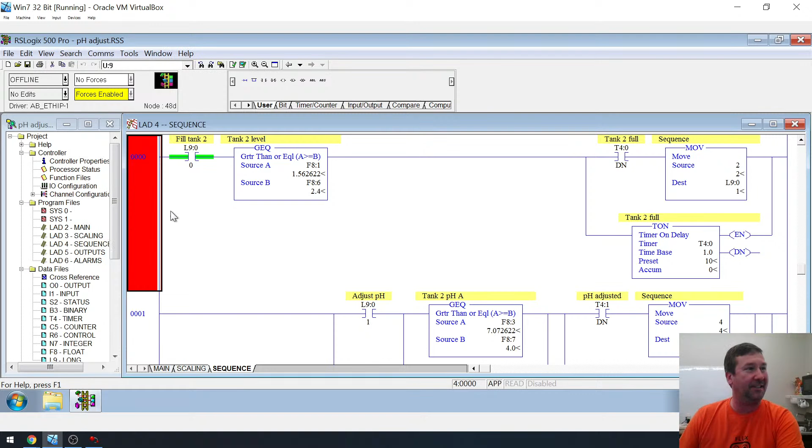And this isn't a complex program by any means. That's why I thought it would be a really good one to try this with. It's got 5 subroutines, and it's fairly basic. So let's just take a moment to go through it. The main routine really is just breaking into various different subroutines. And we get some scaling because there's some analog. All of it's fairly basic, but we got some sequencing, and so we can talk a little bit about sequencing.

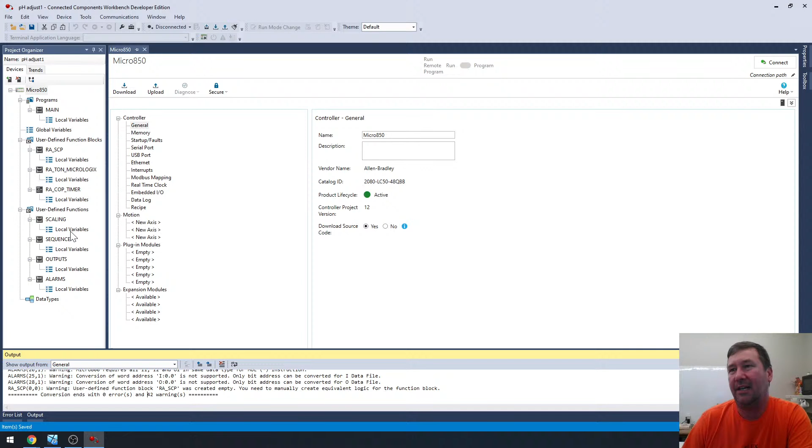And now I hadn't actually looked, but all right, it does make kind of a TON conversion. That may even be worth a video. As yeah, it is converting the TON into more of what we're used to seeing in RSLogix 500. Let's see, scaling. Again, it doesn't look bad. You can see it couldn't figure out exactly where this analog input was.

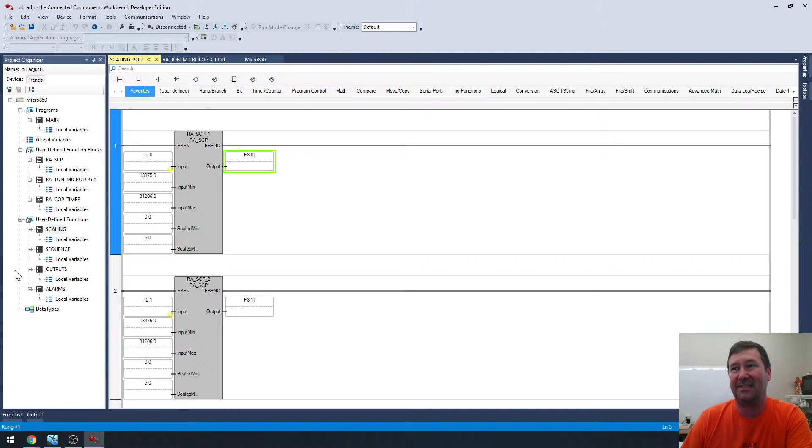There'd be some mapping. But here's where I start to have a problem with most of these conversions: this was F80 in the previous program. And that is how the data structure works in RSLogix 500. But we have so many more options in Connected Components Workbench with tag-based addressing. So I see conversions done like this, and they just don't make a tremendous amount of sense. And if we go on into sequence, you're probably going to see some of the same thing.

Yeah, so in this case, if we go back to our RSLogix 500 program and sequence, let's refresh my memory here. Then yeah, we were using actually a long integer to sequence through this, and it was L90. Now I wouldn't use L90 if I could name it something. I would probably name it sequence.

So while this does get you the rough structure for your program, either one of two things are going to happen. You're going to spend a tremendous amount more time trying to straighten out the addressing, or you're going to put it in there like this and really hate yourself later down the road when you need to troubleshoot it.

But okay, so let's just close this out. And then we're going to start a new program. And we'll just call this PH. And we're going to create it. And then for my controller, I have a Micro850 PLC. And it's going to be a 2080-LC50-48QBB.

That'll be it. And this is, because somebody asked me when I posted that I was going to do this, well, why would you not just use another MicroLogix 1400? This is a neat new feature of version 13: when you select these, it'll tell you whether they are actively supported or whether they're on the obsolete list.

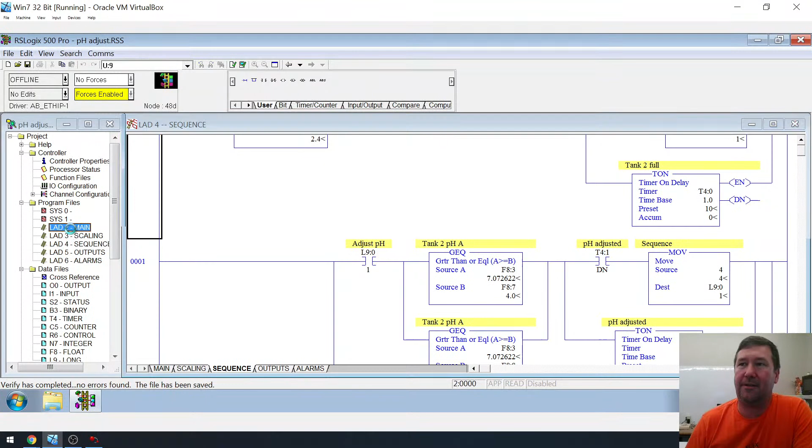And finally, we have alarms. Now, unlike if we had made these user-defined function blocks, in this case, each one of these programs is going to be executed. And they're going to be executed in the order that they are here, which means it's going to be pretty much the same, because up here, if we go to main, well, we have an AFI, which is an always false input, and we won't even need that in Connected Components.

But really, this program jumps to the scaling, and then to the sequence, then to the output, and then to the alarms. And that's the end of the program, and it's going to come back around and do it again. So this is going to do the same thing. We're going to execute the main, calculations, sequence, outputs, and then alarms. And then we're going to do it again. And it is in exactly the order that you have them here.

So if I take the outputs and drag it up above sequence, that is going to change the order of operation of that. So I'm going to put that back down. But yeah, then if we actually look, we're done with the main program. Now, chances are when this machine actually goes into service, there'll be something in here, and I don't even know what it'll be. But we're actually done with the main program because we have the always false input, and we've replaced our JSRs with these.

So now let's go on to our scaling. So in our scaling routine, it looks like slot 2, input 0. All right, that was our tank level, and it's 0 to 5. So we're going to make a structured text example of this. Oh, but I didn't add my I/O module. So yeah, I created the Micro850 here, but down here I have an expansion module. I have a 2085-IF8.

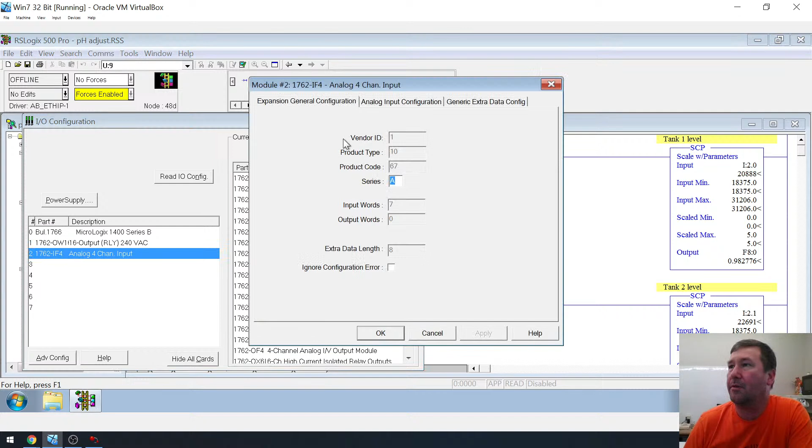All right, and let's just go ahead and look at what we have and what we're using. So we're using 1, 2, 3, 4. Looks like we have 4 of those inputs we're using. And it looks like they're all set up for 4 to 20 milliamp. But if we're not sure, we can double click on our I/O configuration and then double click on the 1762-IF4. Go to analog input, and yeah, we're 4 to 20 milliamps on all 4 channels.

All right, so channel 0 is enabled. I think all these are probably enabled by default. Yeah, and I'm just going to leave all of them enabled. They're all default configured for 4 to 20 milliamp and for engineering units. And so I should have got that up already, but engineering units, let me just Google 2085-IF8 scaling. Just make sure I'm right on this.

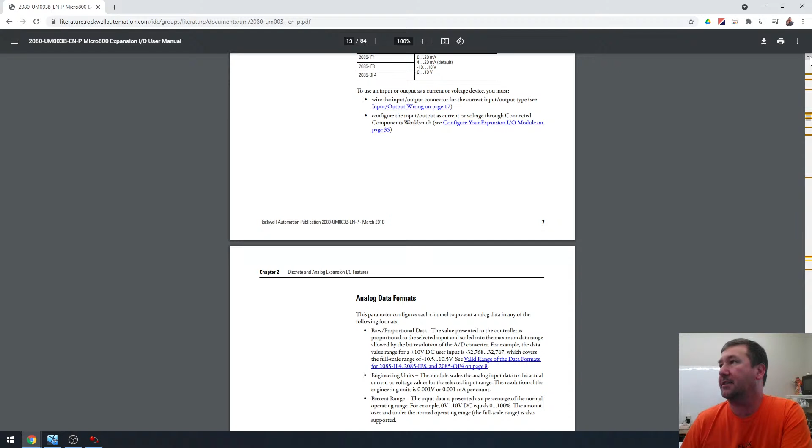Yeah. Okay, so if we look here, here's the manual. We have, here, what are we on? Page 8 of, let me go back up, what manual is this? Google's awesome, but sometimes I don't get all the details. The Micro800 expansion I/O modules. And if we go down to page 8, then we can see what our engineering unit scaling is going to be. So we're configured for 4 to 20 milliamps here.

And at first it may look a little weird because the scaling is showing 3200 to 21000. But if we look down here on note 4, it says the full range value of a 4 to 20 milliamp is going to be 3.2 milliamps to 21 milliamps. So that's where we're getting this value from. 3.2 milliamps is 3200 and 21 milliamps is 21,000. So 20 milliamps is going to be 20,000 and 4 milliamps is going to be 4,000. We can scale it in between there. All right, bring that over here.

Okay, so let's go into what we label our program called calculations. And then, yeah, well, we haven't even talked about where I/O is. So now, and I didn't even catch this. So I'm in version 13, and all of a sudden it was a little bit of a struggle because I normally use the Logix view. So I'm going to switch over to Logix. And I got to tell you, Rockwell, y'all have done a great job of really massaging this.

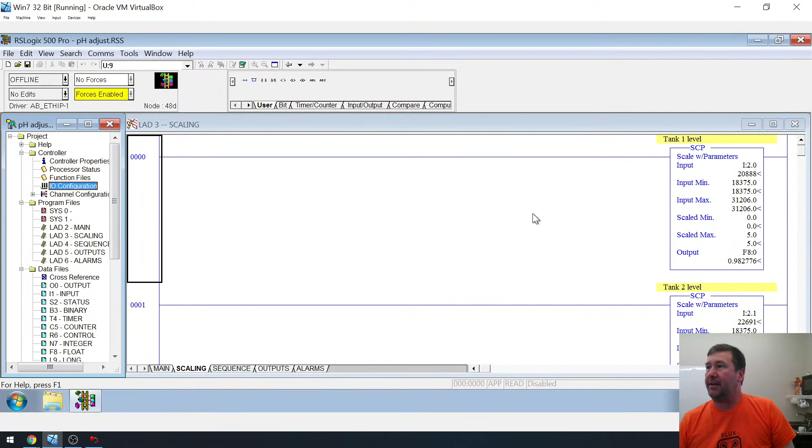Actually, we should go ahead and put some descriptions in before we go too much further. So if I go over here, well, I can see them all here, but let's go ahead and right click and go to data table. Input number 2 is going to be tank 1 level raw. So I'm just going to go over here and label this one as tank 1 level raw.

And then we have tank 2 level raw. And then we have tank 2 pH. I actually have a spare there. Okay. So tank 1 level raw, tank 2 level raw, and then tank 2 pH. And then let's go up and label all of our inputs and outputs while we're at it.

So if we just use our box down here in the bottom left, we're going to go to outputs first. So O, and then let's see, we have 0 is a spare. And then 1 is going to be an alarm light. And then 2 is going to be a buzzer, then a spare, and then pump 1. So alarm, buzzer, spare.

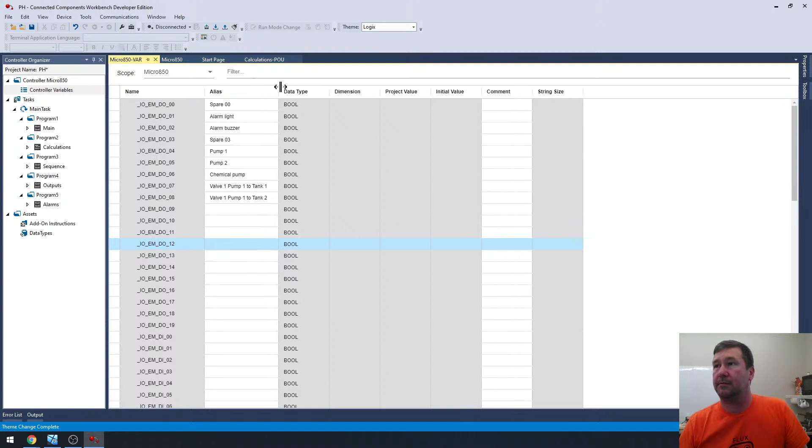And then number 9. All right, valve 2, pump 2 to tank 2. And valve 2, pump 2 to effluent. Valve 2, pump 2 to tank 2. Valve 2, pump 2 to effluent. And then we have number 11.

All right, it's spare. Let's drag this out just a little bit, so we can see it all. And I'm going to hit the usage here. Okay, so those are the only outputs that are used on it. Then our inputs down here. Let's see. I don't think there's any discrete inputs used on this. Oops, no, I'm on outputs right now. No wonder this doesn't look right. Okay, let's go to there.

Okay, there are a few inputs used on it. So we have input 4, which is emergency stop pressed. And before somebody says it, no, the emergency stop on this is hardwired. This is a signal to let us know that it is pressed. So input 4 is going to be emergency stop pressed. And then input 5 is going to be 24 VDC power OK. And then we have an alarm silence, and number 9 is a downstream interlock.

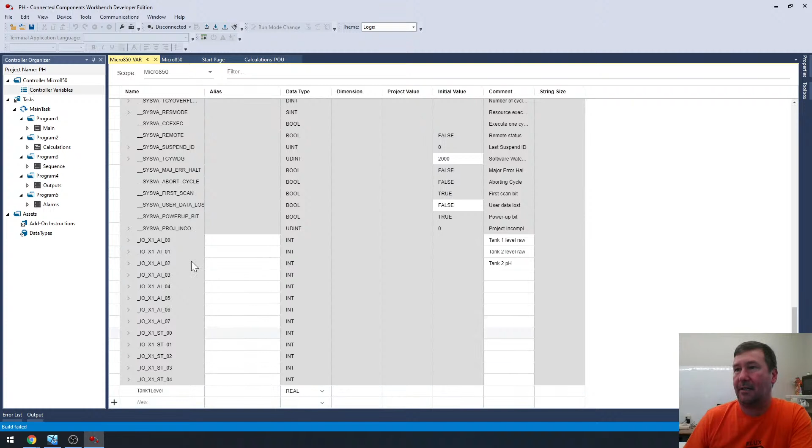If we go and look in our controller variables at our expansion modules, they are integers. So they are whole numbers. And so when you're manipulating data, you have to stick with whatever you have. And so what we need to do is convert this integer into a real. Or we could specify everything else as an integer. And I do see that done, and then people will like multiply 10 at the end of it. But I guess it doesn't matter in the end, but I think it just looks better to say 5 or 4.5 feet or something.

So what I'm going to do is I'm going to go to the beginning of this, and I'm going to type any, and you're going to see all the any instructions coming up. And if you're not familiar with those, we got some videos on those. But we're going to find the any to real. And we are going to any to real that value.

And now we'll hit our verify. Okay, and that error goes away. Now the semicolon, that's the one that usually whips me. So let's take the semicolon out just so you can see what that would look like. So if I hit the verify now, semicolon expected before this new statement. And if we double click on it, it gets us close to where it is. And really, if I see that, I just start looking down the lines, which obviously we only have one right now, but start looking down those and chances are you'll see it.

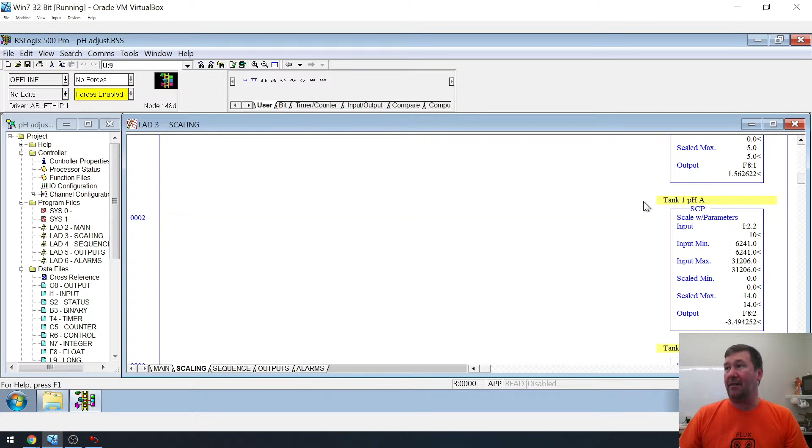All right, so the second one will be tank 2 level, and it is the second input on that expansion module. So let me make sure I'm not making a big assumption. I assume the scaling is the same. 0 to 5, 0 to 5. Okay, and then we have a pH, and our pH scaling is 0 to 14. And I really wish I had a scaling that the lower number wasn't a 0, because that's probably a good thing to go through. But we'll save that for a different video.

So this one will be tank 2 pH. And we are going to multiply by 14 instead of 5. And go ahead and hit that verify again. And hopefully I got my math right there. Like I said, we won't be testing this today. This is more of let's write the program.

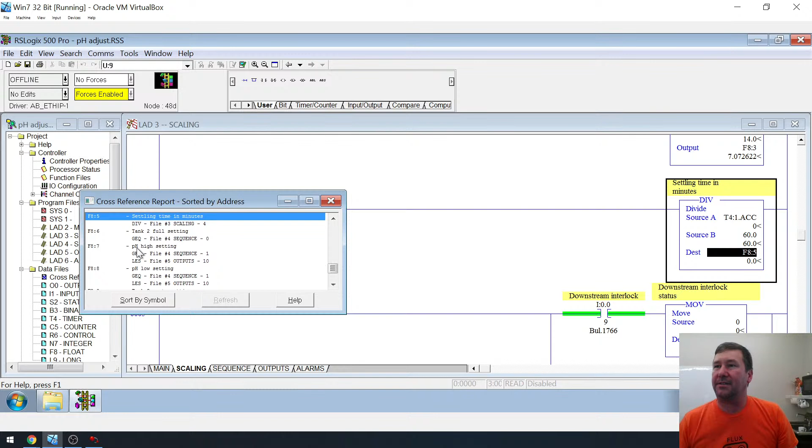I was getting ready to say, I think we're done with our calculations, but no, there was something else down here. Okay, so we are settling time in minutes. So we're making something probably for an HMI screen. Yeah, this was probably read in the HMI. So I'm going to right click F8.5 and figure out where this is used. So go to cross reference. Okay, and so this is the only instance this is used.

And if you see something in a program that is the only instance it's used and you're like, well, they're not actually doing anything with it, don't ignore it. Because it could be connected to a larger system, such as a SCADA system, or in this case, there's an HMI that tells you how much more time there is that this needs to settle before it's going to run on through the process.

I really want to go make that timer first. So what I'm going to do is create just a spot here, because we'll get to that timer fairly quickly. Oops, okay, here's where I didn't review this, but I still think I like the way I did it, because I really wonder why that timer is where it is. I can do that in structured text. All I'd have to do is put the timer value divided by 60, and we would have it. Actually, yeah, I probably would do it that way. So I'm going to go over here to our sequence, because that's where it comes from.

And I am going to go to the timer tab and bring down a TON instruction. And immediately when you make a TON, it names it something, such as TON_1, which is okay, but it's not necessarily the most intuitive thing to find later on.

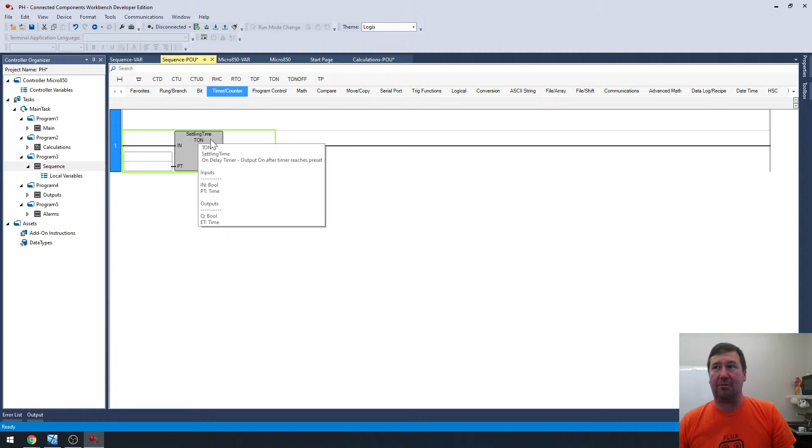All right, now that just makes it so much clearer what it is. And I see a lot of programs that have TON1, TON2, TON3. I just think this makes it a lot easier to understand later. So now let's go back to our calculations.

And, well, one, we need to create a controller variable. And I do want these particular ones to be controller variables, because this is something we're reading from elsewhere, or sending elsewhere. So this is the settling time in minutes. Now, you may be tempted to make this a time data type, but this actually isn't a time data type. This is a real. We go back and look at our original program. It's F8.5, and F8 is a floating type variable. And so that's going to give a decimal of how many minutes are left.

So now let's go to calculations. And we're going to put that our settling time in minutes is going to be equal to settling time. Ooh, all right. So I made a mistake there because I said that was in a local variable here. And I said earlier, I think I would put this over with this one. Because really, I like to group stuff by its function, and this was probably added later, and honestly, I did write this. It was added later without a lot of thought because somebody probably wanted a timer. I'm like, yeah, throw a timer in, throw it on the HMI, and we're done.

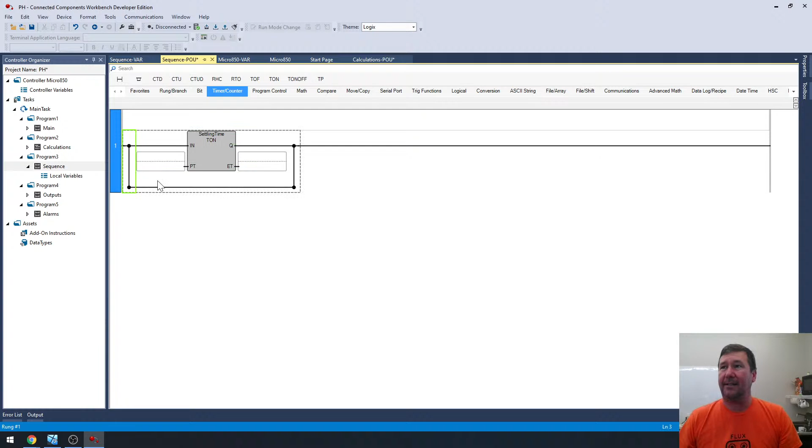But no, if I was writing this from scratch, and here's why I don't like the automatic conversion tool, the MicroLogix to 800 converter, this is one of those cases, that little glance of it, I just realized, okay, that could have been done a lot better. So I really do want this down here in this sequence, and I probably want it right here with this. So I would probably put a branch here, and then I would bring down an instruction block, and it would be a divide.

And okay, first we need to assign this elapsed time. So we're going to create a variable. And this will be settling time in milliseconds, ms. And so I'm going to make that a DINT. And then we're going to take that same thing, we're going to put it right there. And then make sure I'm on the right track here. Yeah, okay, that was divided by 60.

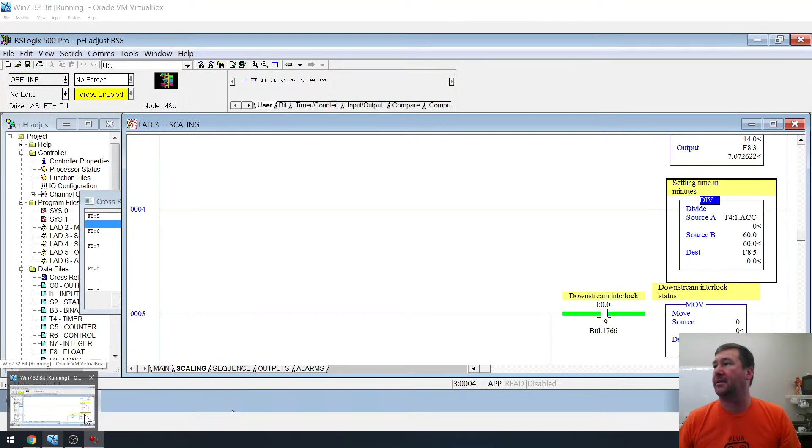Now, this is in milliseconds though. So we're going to need to divide by 60,000. Or, can I do that here? I know I want 60 seconds. I can put T#60S. And that's going to tell it 60 seconds. Oh, and it doesn't like it because that's a time data type. Okay. So it would have to be 60,000. And then we're going to put that in settling time in minutes.

Okay, now you notice right now there is no preset time. We'll come back to it. Right now I'm trying to still get to that calculations program. I think there was one rung left. Okay, so then we have a downstream interlock. And it looks like both of these were probably added at the same time, and they really have to do more with some HMI signals that were needed.

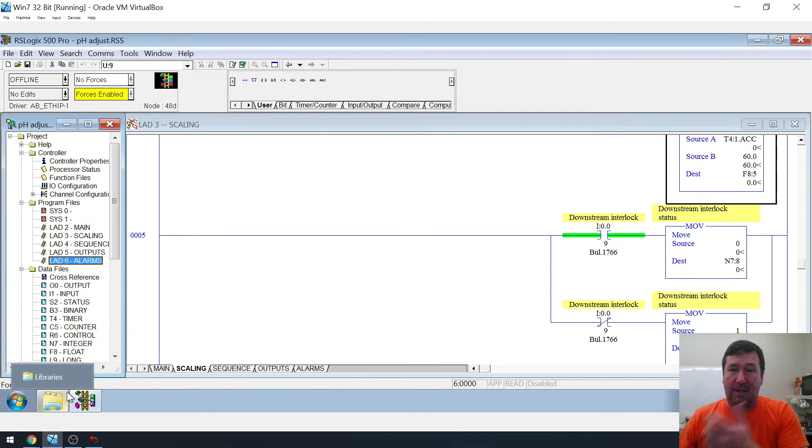And I was probably thinking there might be a multi-state needed eventually, but it looks like I only used 2 states. Here we're going to keep it like that. But I'm going to move it to the alarms program because I think it makes more sense there. The alarms are really mostly HMI indicators, and this is an HMI indicator. So there you go. Now you know, guys, my programs aren't perfect. But all right, so we're going to go to the alarms.

And that was going to be input 9, so we'll go to the I/O tab, and we're going to go down to our inputs and find number 9. And then we're going to bring an instruction block down, and this will be a move. And in this case, let me make sure I got these straight. If we have a 1, or if it's examine if closed, then we put a 0 in. So, okay, that one's wrong. But we're going to use it in a second.

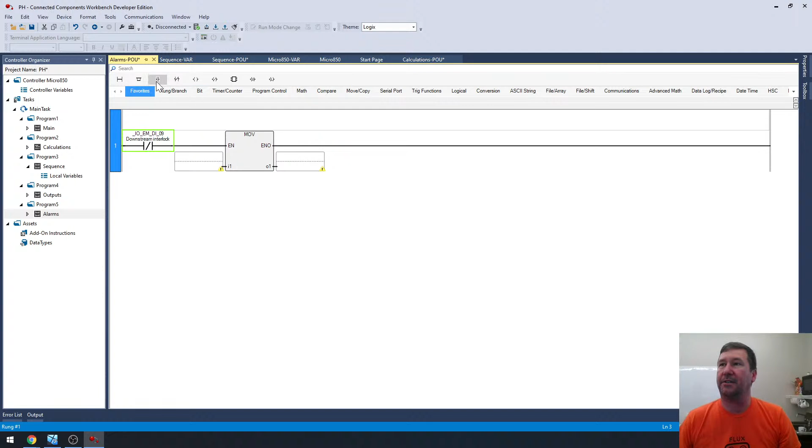So let's go and put a branch in. Drag that and that. And yeah, we're going to put a 0 here. Copy that. I'm going to paste it here. Oops, got it on the wrong side. There we go. Okay, and this needs to go to, I believe that was an integer. Yeah, so N7:8. Okay, this is downstream interlock status.

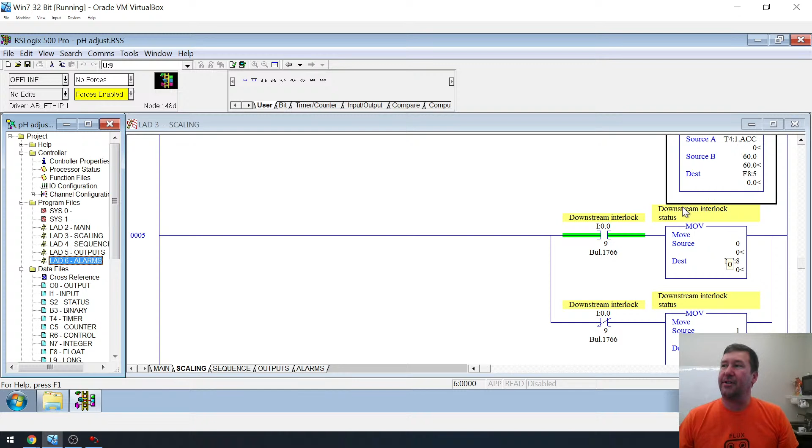So that's what I'm going to name it. So I'm going to double click here. And it's going to default to local variables, but I need this on the HMI, and so I'm going to make it a global variable up here. So downstream interlock status. And that will be a dint. Put that there. Okay, and then, is that it? That is it. So that's it for our scaling. So next we're on our sequence program.

All right. So this one, and I thought, man, we ought to do a video on this. We did some binary videos, but this is actually putting values into an integer. Actually, this is a double integer to shift bits, and that's how it's tracking it. So yeah, this is actually a pretty good one. Maybe we will set this up on a trainer and see if we can do some simulations with it. It might be a good one to kind of talk about sequencing some more. But all right, we're going to start with just building out this basic structure.

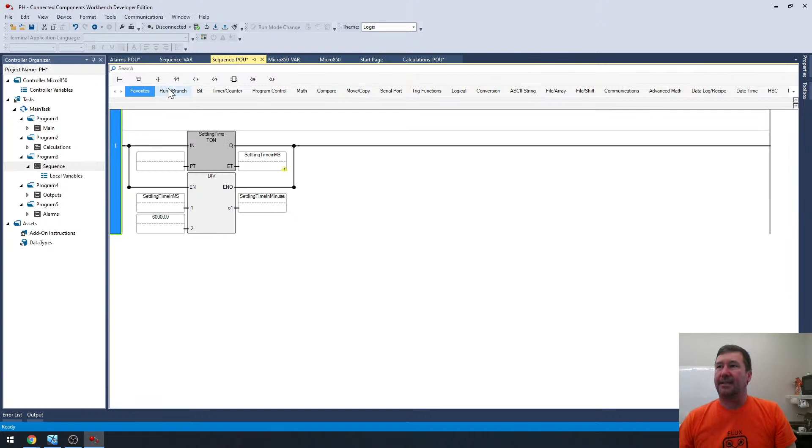So we have an XIC, greater than or equal to. We have a timer, and we have a move. It'll be a miracle if I remember all that, but let's try it. Okay, so we have this that we've added, this settling time, and we'll find a home for it in a little bit. For now, let's bring a rung right above it. We have an XIC. I'm just trying to build the structure right now. Then we have a greater. Is it greater or greater than equal to? I can't remember now. It's one of the two. And then we end up with an output.

Oops. And then we had a timer. No, we don't have an output. We have a move over here. Well, let me just go back and look. We have a move. And then there was a branch. Oops, didn't get that right. Timer goes in the top. And there was also an examine if closed. There. So let's see, is that the right framework? I think that's about the same. Yep, I think I'm there.

So we have a timer for tank 2 full. All right, then we have a sequence. And F8:1 is tank 2 level. All right, and then that sequence, this L9:0/0 is the same L9:0 right here. We're just looking at bit 0 on it. So we should be able to just create a tag right here. And I'm going to make this one a global variable because it is also in the HMI. We're going to call this sequence.

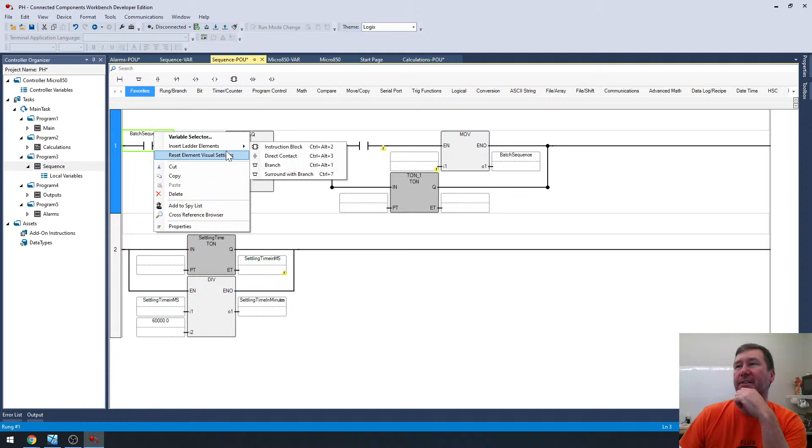But you know, I think I've ran into this before. I don't think I could figure out how to add a description to a bit based off of that. So hey, there's something maybe somebody can help me figure out. I do not know how to add a description to this. So this is going to make this one really difficult. I'm going to have to think through that. Because, yeah, I don't think that's a good idea.

So, yeah, I'm not going to do it this way. I'm going to put something in for now, and maybe somebody can tell me exactly how we're supposed to do this. What I'm going to do is I'm going to copy that, and we're going to make some rungs down here. And we're going to make a tag called sequence fill tank 2. And I'm going to use that.

That way, whenever this sequence 0, which is what our sequencer is based off of, whenever bit 0 is a 1, it's going to make sequence fill tank 2 a 1, and I'm going to use that. That way, when I'm visually looking at this, I can tell what it is. Now, I think there's probably a way to add a description to this, but I worked at this one day and I could not figure it out. Because when you get in the variable selector, can I put .0 here? Nope, can't do it. Okay, so I don't know how exactly to get by that, but this is how we're going to do it. All right.

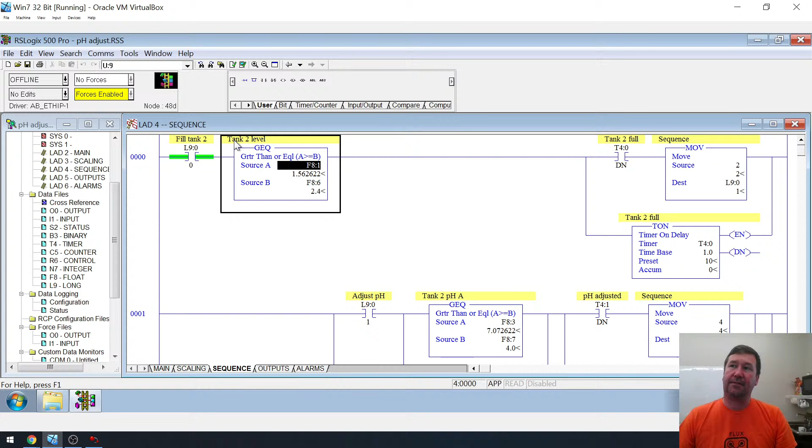So then we're looking at tank 2. So we can just type tank 2 level. And then we are looking for it to be greater than F8:6. And when you're looking here in RSLogix 500, you're going to see the description of the source, or in this case, source A. Now, if you're writing to something like here, you see the description of the destination. Source B, you can't actually see the description of by mousing over or anything. You've got to right-click it and either edit description or go to data table.

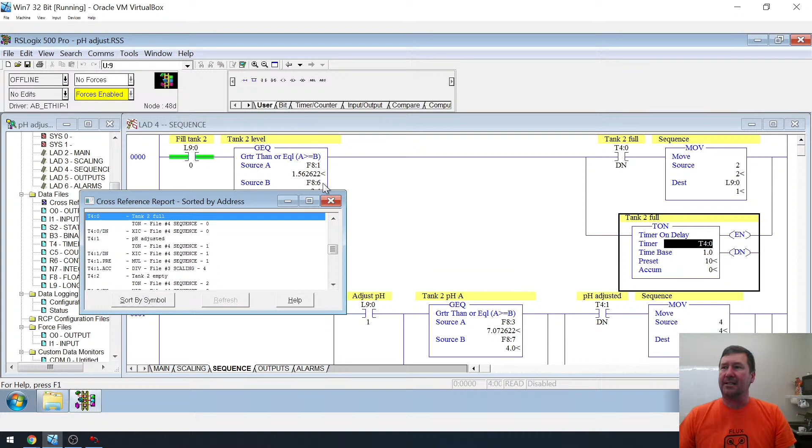And so this is tank 2 full setting. So I'm just going to create a tag that says that. So tank 2 full setting, and it'll be a real. And then we have a timer, and I don't believe this timer actually is settable externally. So what we're going to do is we're going to right-click T4:0 and go to cross-reference. And okay, the TON, which is right here, is used, and then we have an XIC of the done bit right here. So you cannot externally write to this, and this was a 10-second timer.

So in the case of Connected Components Workbench, I just go right here and type T#10S. And that'll be a 10-second timer. Oops, if you put it in the right place, it'll work better. That should have gone right here. Now, I don't have to put an elapsed time tag in if I'm not actually using an elapsed tag. So in this case, actually, whoops. Oh no, okay. Now, one thing I didn't do is I haven't actually named this TON. So see, it went in as TON_1 again.

So we want to go to local variables, find that, and in this case, this is tank 2 full. Oops, yeah, that's good. So that'll be tank 2 full, and then here I can look at tank 2 full.dn. I'm sorry, it's not .dn, it is .q in Connected Components Workbench. And that's one of those stumbling blocks. I do have a video about what all these are, but we want the q bit, which replaces the done bit in Studio 5000. And all right, then we're going to move a value to this batch sequence, and we are moving a value of 2. So we're just going to put a 2.

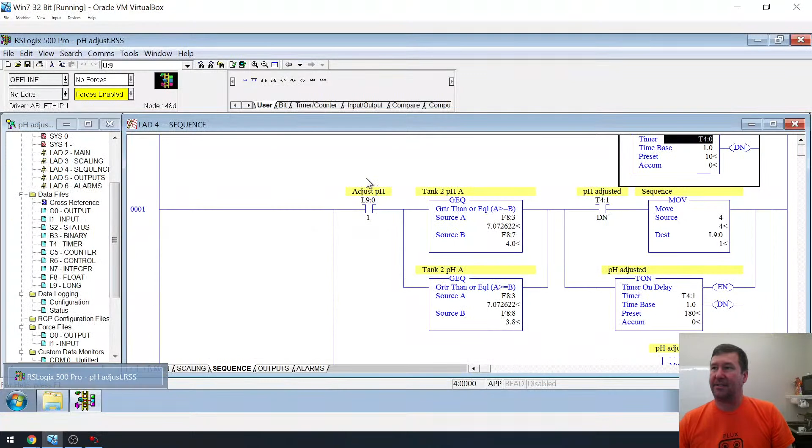So first, what is this step actually doing? It is adjusting the pH. So I'm going to go to the bottom and we're going to make sequence number 1. This is going to be sequence pH adjusting, or adjust pH. Oops, and I need to create that thing.

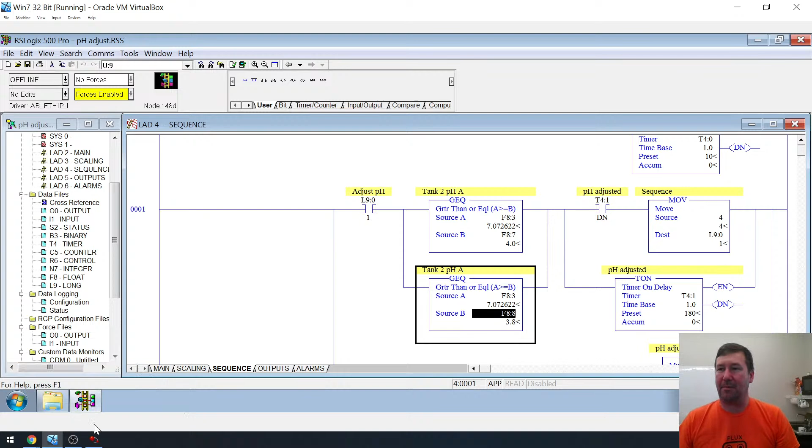Alright, so then we can copy that, and that will go right here. And okay, in this case, we are looking for our pH to be greater than, what is F8:7? Our pH high setting, or, let's see, pH low setting. I'm not exactly sure why this was done like this, but there's probably a reason. But usually, this lower one would be a little different, but it's been a while on this one, so I don't really remember what was done. But okay, so we got that.

So this is going to be tank 2 pH. And then we need a tank 2 pH high setting and a tank 2 pH low setting. These are both going to be global variables. So tank 2 pH high setting, it's going to be a real, and tank 2 pH low setting, and it's going to be a real. And we're going to be looking at the high there, and then we need a branch around that.

And we're actually going to copy this, put it right there, whoops. And then this, whoops, did I not enter it? I did not enter it. Or am I editing the wrong rung? I'm editing the wrong rung. Alright, well that's why we have the undo key here. And we'll put our branch down here in the proper rung. And then we'll copy that, put it there, and change this to low.

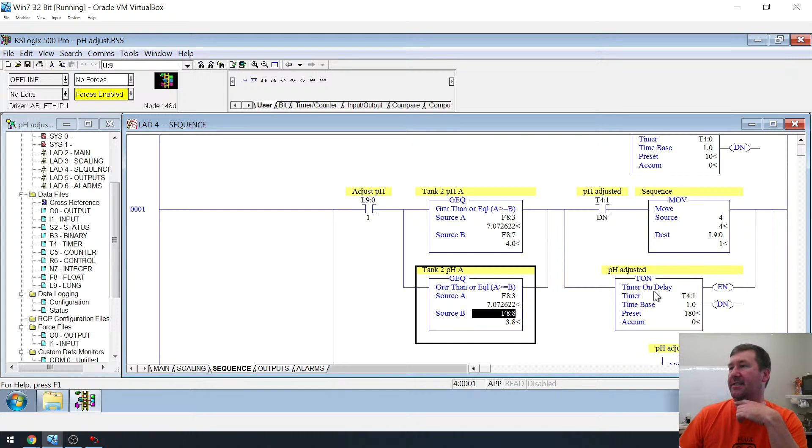And then what do we have? We have a pH adjusted timer. And T4:1, this is that timer we've already stuck a little bit of from the scaling, yeah. T4:1. Okay, so this rung that we have is going to find a home now. Alright, so adjusting, and then we're going to move a value of 4 when it's done. So pH adjusting.

And one thing I didn't catch is when I copied and pasted, I put the wrong one in the wrong place. Let's move that there. Let's move that there. The dangers of copy and pasting. Alright, so now this needs renamed. Tank 2 full 1 is now going to be tank 2 pH adjusting. Alright, so then this will be tank 2 pH adjusting. Alright, and we're going to move a value of 4 when it's done.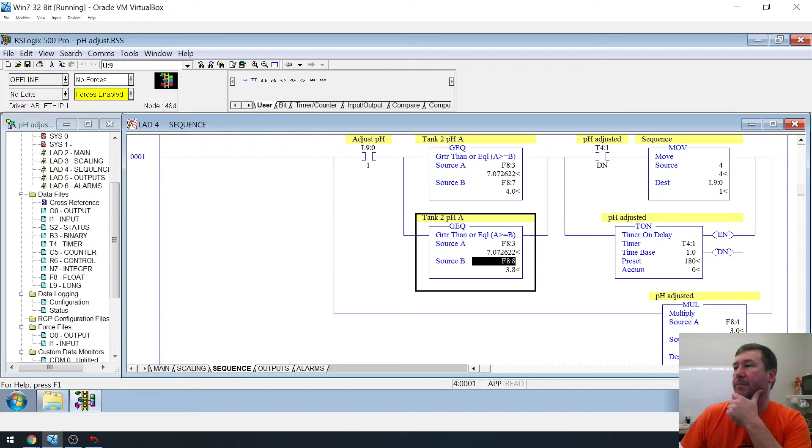Okay, and then we have a value here though. So this, in this case, we are actually getting this value from the HMI. It looks like it's in minutes. So we're going to have to create something for that. So this will be our pH. Really, this is our settling time. It's kind of pH adjusted time, I guess. That's the cool part about tag-based addressing: if I find out later that it was the wrong thing to put, we can change it.

But all right, we're going to go to controller tags, and we did name that one settling time in minutes, which is wrong actually. That's settling time left. And let's make it pH settling time left in minutes. And we're going to create one that'll be pH settling setting. Geez, there's a tongue twister. pH settling setting in minutes. And that's going to be a real. It's not actually a timer tag.

All right, now let's go see if we can put that in here. So first, this does have to be a time data type. So if I just type pH settling time in minutes, oh, see, it's not even coming up. So there's the whole deal. These are the only ones that are optional. I'm surprised some of those come up though. pH setting in minutes. There it is. Okay, if we bring that in, it says data mismatch. And that's because if we mouse over this, it says that we're looking for a time data type, and we have this as a real data type.

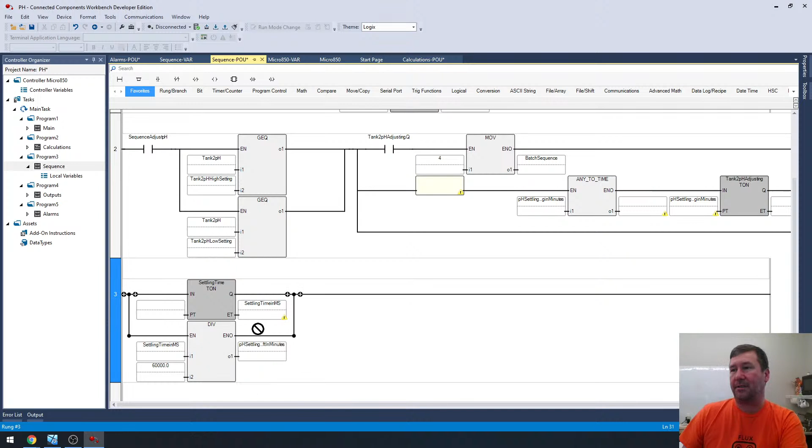And first, we're going to drag this. Is that right? This is a TON. Oh, because we added that TON. That's actually the TON we're looking for there. Got to keep track of where I'm at on this. Settling time in minutes, or in milliseconds. That does go right here. Oops, no. I haven't created that yet. There it goes. Yeah, we're good there. And then this goes away. And then we need to take this part and just move it down here.

And the reason we're moving this down here is just organizational, to keep our brain straight. That rung was getting ready to get way too big. And really when I'm troubleshooting it, the main thing I'm going to know is: is it in this step right here, and what are these values? Because that's going to start this timer, and that's what's going to get us through the sequence. This one right here is more of just figuring out some math for it.

All right, where was I? Okay, we have an ANY_TO_TIME, and then we needed an instruction before because we had to get that into milliseconds. So we are going to do a MUL, or multiply. And our I2 is actually going to be this. In fact, this ends up being the opposite of what's right below it, because here we're dividing to figure out our stuff in minutes. Here we're going to multiply to figure it out in milliseconds. So this is 60,000.0. And this input is going to be that settling time.

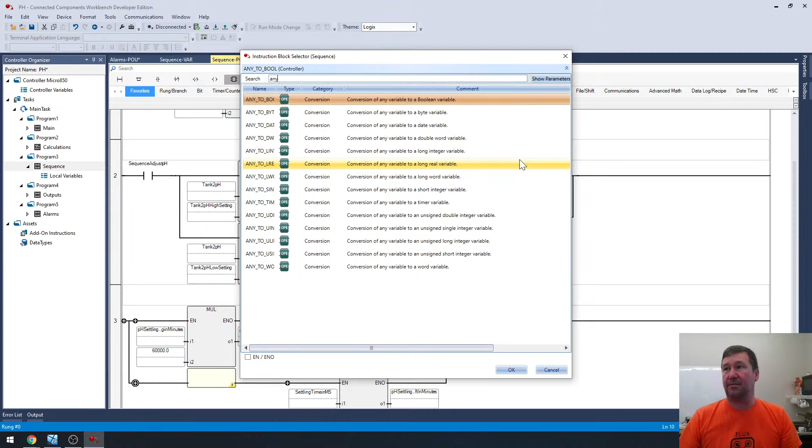Probably next week. You notice the any-to-real is missing, and I don't fully understand why, but in the Logix view they consider the STOR, which is a string to real conversion, to be the any-to-real. So just be aware of that. I just figured that out not too long ago.

But so this needs to go here. And man, we've got to make another one of these crazy pH setting things, because now we need pH setting time left. All right, yeah. Or I'm just going to put ET in time, elapsed time in the time format, and it'll be a time. So that goes there. Then we can copy that and put it right there.

And there we go. Oh, why has that got an error? Oh, why did I not do a real on this? This should be a real. That's a mistake on my part. So settling time in MS, the only one that actually isn't a tongue twister, is wrong. Oh, come on now. So that should be a real.

All right, we've done enough here. It wouldn't hurt to go ahead and hit this verify button up here, and let's just see what we might have wrong. And that's always a refreshing surprise when you actually have no errors in the program. All right, so the next one, we've gotten through batch sequence number 1. Now we need number 2.

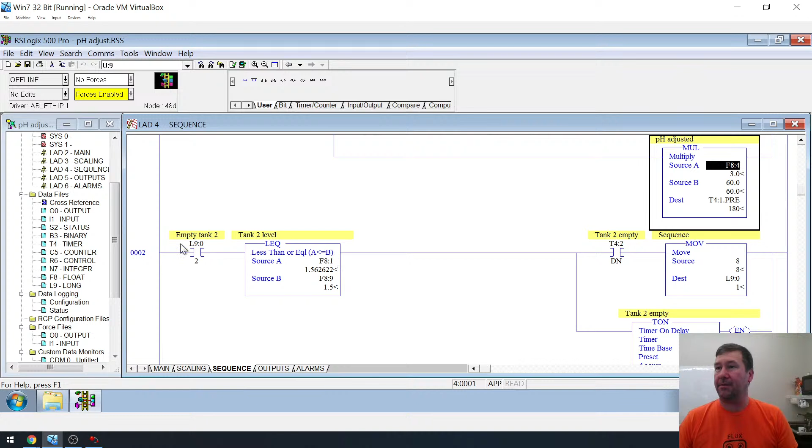Okay, this looks very much like rung 0 or rung 1. In RSLogix 500, you start with 0 on your rungs. In Connected Components, you actually start with 1. But this rung is very similar to the one we're getting ready to do, so I am going to copy it. And then I'm going to come right down here and paste it.

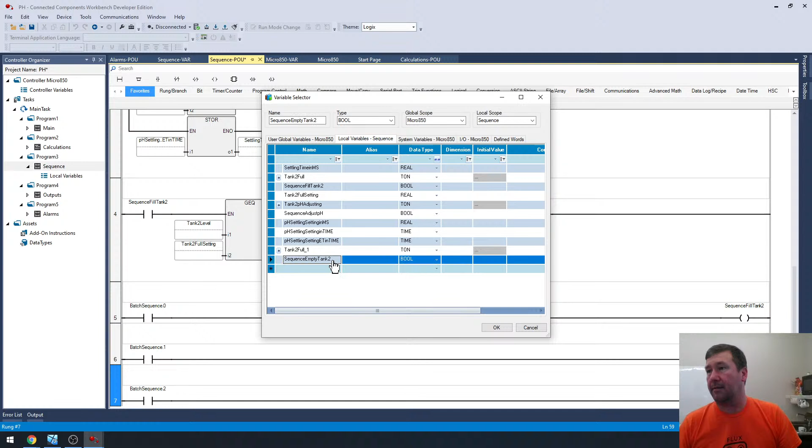First let's go ahead and get this batch sequence in. I'm hoping somebody will tell me a way to label these, because the only reason we're doing these 3 rungs down here is I need to label each one of these bits, and I just can't figure out how to do it. But this will be empty tank 2. So we're going to call this sequence empty tank 2, and it'll be a boolean. And then we can take this and put it in place of that.

Okay, so first this is empty tank 2, not tank 2 full. So let's go ahead and edit it, find that, and it will be tank 2 empty. Okay, and what does it call for tank 2 to be empty? Tank 2 has to be less than the tank 2 empty setting, which makes sense. So we're going to create a tank 2 empty setting, and it'll need to be a global or controller variable because we're going to set it on the HMI.

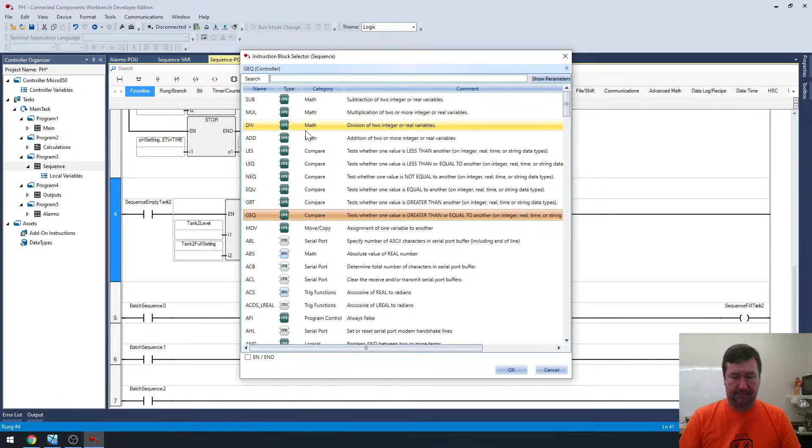So this will be tank 2 empty setting, and that will be a real. And this will change to an LEQ, and this will be tank 2 empty setting. All right, and then this will be tank 2 empty Q. Probably this is not settable, but we're going to cross-reference T4:2. And yes, it is only used right here.

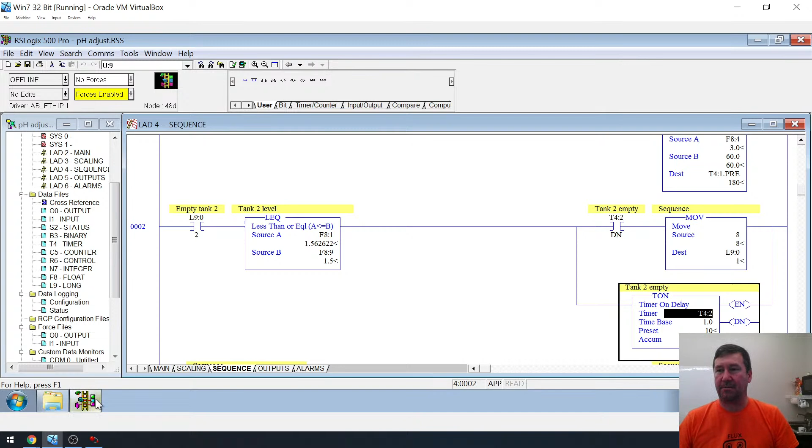So there's just a 10-second delay, probably because there was some turbulence in the water, just to make sure it was actually reading okay. So first, that goes right here. It already is. That one's set to 10 seconds from the first one. And then what are we moving? A value of 4? I think I may have skipped one. Let me double check. We're moving a value of 8. No, okay, it's right here. 4, that's the rung we added. So then we're going to have 8. Okay, and then what do we have?

That's why I thought this program was really good. We just went through a really basic 3-step sequencer, and with a little bit of massage you should be able to put this into your trainer and make it work. In these conditions right here, we're really going to just reset our sequence. It looks like there's a button to reset the sequence. We reset it on power up. And reset's not the right word; the sequence starts at 1. So if we're less than 1, we move a 1 to it. And if we're greater or equal to 8, which means our tank is empty, the process starts over.

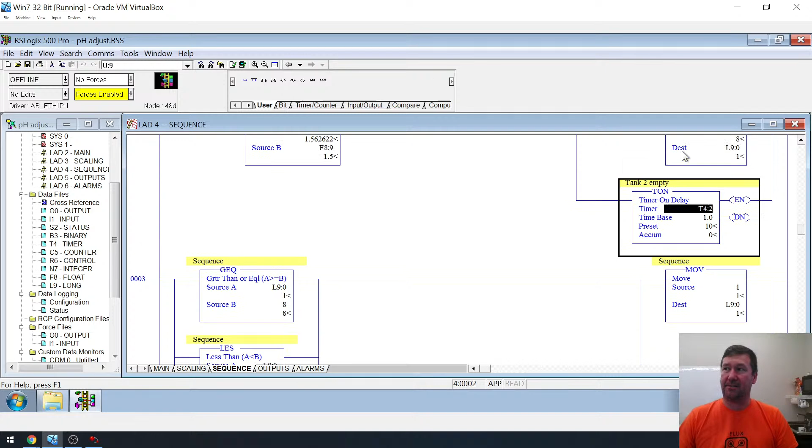All right, so we need to add 3 branches here, 2 over here. We're just going to start building the structure out. So we're going to bring a couple branches, and then we're going to click the bottom of it and right click. Oh, come on now.

Why does it not let me grab that? I think I have to actually put something in there usually to grab that. So yeah, we'll go ahead and put something in. Just bring an instruction block down. And now we can insert it. So below, need one more.

That gets us close. All right, then we have greater than or equal to, a less, and 2 XICs. So GEQ, the instruction block for a less, LES, and then we have that. Up here we had an unlatch, and we had a move.

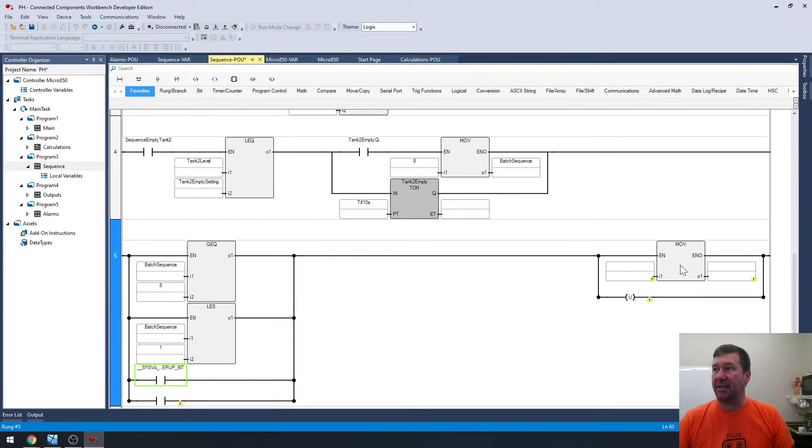Okay, so yes. F1, and then I searched over here for that bit, and yeah, it is true only on the first scan after a power up or running new ladder for the first time. So that is the bit we're looking for. So that way every time we cycle power it starts over. And that last one was it just called sequence reset?

Yeah. So we're going to make a global variable because this is on the HMI. It says sequence reset, and it will be a Boolean tag. So sequence reset, and that's what it's unlatching over here. That way the HMI puts a 1 there, and when it's done resetting, it sets it back to a 0. Sequence reset. And then in this case, we're going to be moving a value of 1 to the batch sequence.

All right, so that takes care of our sequence. Let me make sure before I jump the gun and say that. Yeah, so that's the end of that one. And now what are our outputs? I didn't actually think about it, but this one's good because somebody asked recently how to do HOAs in an HMI. And this is how I would do it in Connected Components Workbench, although I'm not going to use N7:0 for it. I'll create an array of integers, and that's how we'll do it. So let's go ahead and start that.

We're going to go over here and we'll open up our outputs. And just for housekeeping, I'm going to close all these. Well, I was getting ready to save, but let's make sure we save everything. I haven't saved this at all while we've been doing this, so I probably ought to hit that save button.

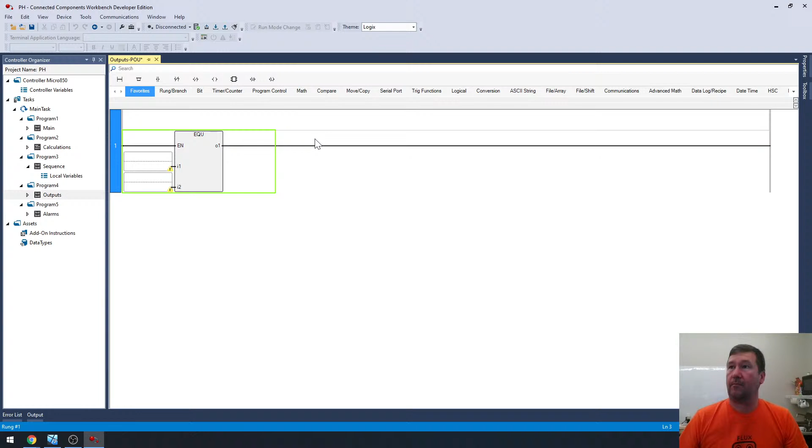All right. So we had an equals, and then we had a branch, and we had another equals, and then in the bottom rung, we had an AFI. Now, an AFI is an always false instruction, and that means no matter what, it is going to be evaluated as false. And this is more of a place marker. Hopefully it's not a lot of them.

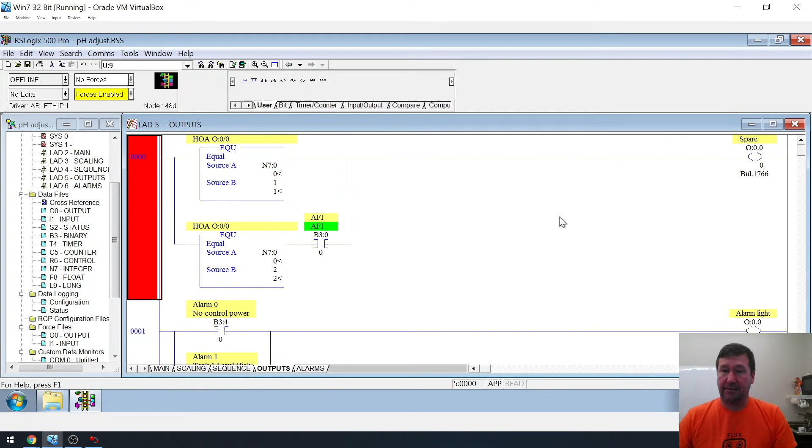Yeah, output 0 wasn't used for some reason. Oh, yeah, output 0 on this one had some high speed uses, and I was probably thinking we would add some high speed output for something. So I left it open. But all right, then we're going to energize our output. So we'll go right here.

And we're going to go to our I/O tab, and there we are, spare 0. And then we need to create a tag for this. And here's where, I don't think I create one for each one of them, but okay, we have 20 outputs, 0 through 19. So I would create a tag, let's just call it HOA outputs. And this is going to be an int.

But then for our data type, oh, my mind's going blank on how to do this now. I feel like I'm getting ready to do something wrong. So this is probably wrong, but that's how you do it in Studio 5000. But yeah, it doesn't like it. Because I know there's some dots required. And we're probably going to have to hit F1 to figure this out. Oh, there it is. Okay.

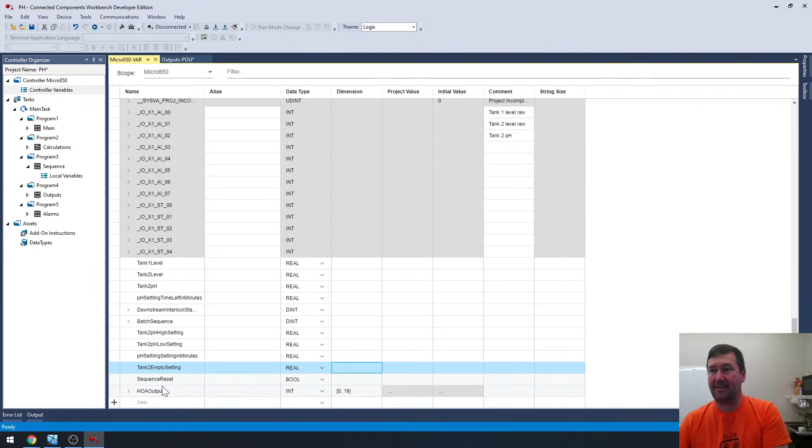Oh, okay. In this, you can specify the beginning and the ending, which is kind of cool. In our case, we are going 0 through 19. So we're going to do 0..19. And that's going to be our HOAs. So we end up with 20 of them here. So this will be output 0's HOA. This will be output 1's, 2's, 3's, and so forth.

So now let's go over here. And we'll just put HOA output, and then open bracket 0 close. So this is going to be the one that controls output 0. And you know, I go back and forth, and a lot of times I will build out the structure for all the outputs. In this case, I'm not going to. I'm even putting this one in because it was the first one. But I probably will stop short because we're streaming this.

But all right, then we have a value of 1 and a value of 2. So right here, we're going to put a 1. Right here, we're going to put 2. And what this is going to say is if our HOA is a value of 0, there is no true path through. So off for my HOAs is 0, and then if we have it as a value of 1, it's hand. So you switch it to hand, it's going to be a value of 1, and that's going to make output 0 come on. And then we have 2, which is going to be auto, and that's going to make it run whatever the auto sequence is.

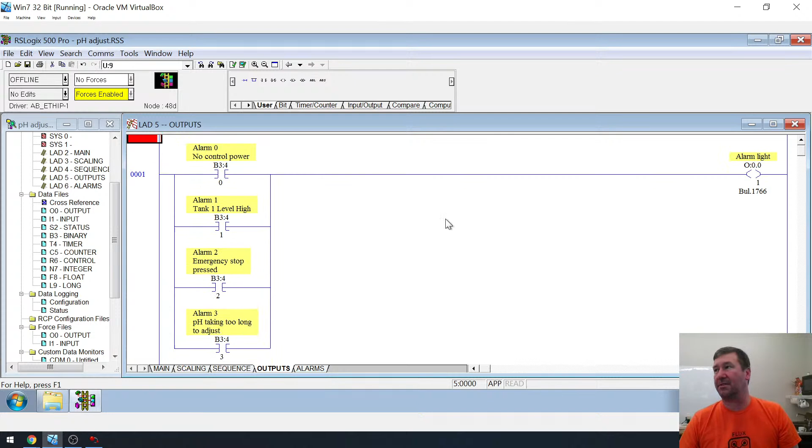And since it's a spare, we have an AFI in it. So we're going to just copy and paste that, and then get to something that actually has it. Okay, well, the second one, of course, is an exception because it's the alarm light. Now, why did I do the alarms this way? That's the grand question. Are there warnings and alarms here? Let me just see. So we're going to cross-reference. Actually, let's just go to the data table and go to usage. Well, I have no idea why I did it this way. But I did. But we're not going to do it this way this time. We're going to create...

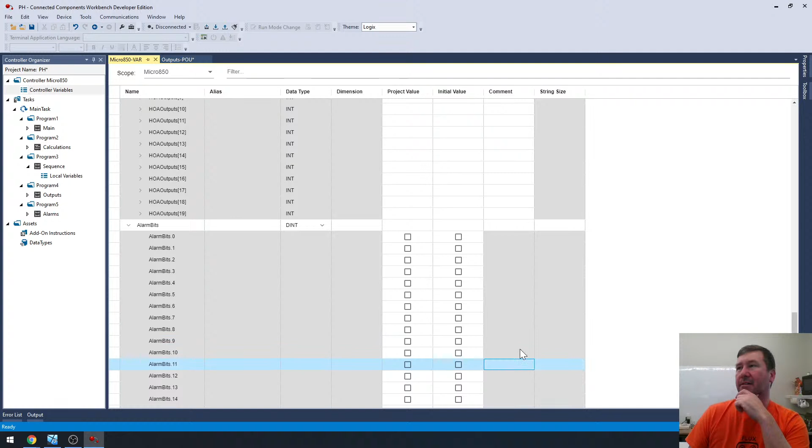Do I want to do that? Yeah, I do. So we're going to go to our controller variables, and we're going to create a tag called alarm bits. And this will be a DINT. And so that's going to give us 32 bits. And why was I able to open this one up? Now I still can't comment it. I still would love to figure out how to comment the individual bits. But okay. Moving on before I end up in a squirrel moment here.

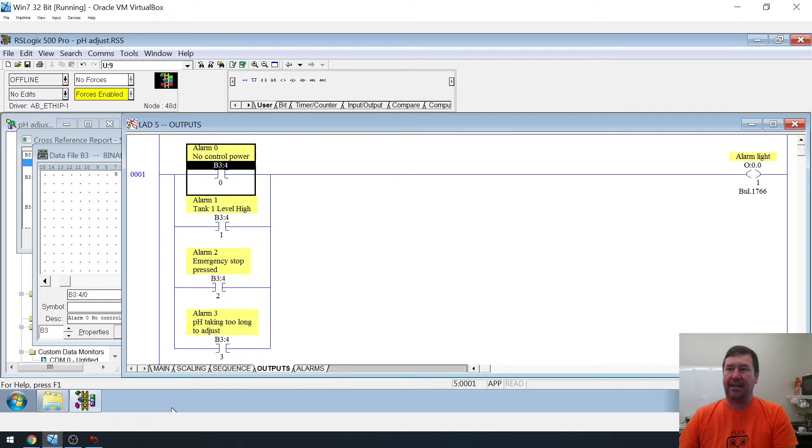Go back here. In this case, this is our alarm light, output number 1. And we're going to take this out. And over here we had these 4 branches. But in this case, I don't know why I didn't, I could have looked for B3:4 to not be 0. Because if any of these are on, it's not going to be 0. And that's what I'm going to do on this one. We're just going to change this to an NEQ, or not equal to 0. And we're going to look at our alarm bits. And that'll make our alarm light come on whenever any of our bits are on.

Okay, so number 2. Oh, and so I sat there and explained the HOA and said, let's move on to something where it'll make sense. But yeah, the next 2 are not. But okay, now we're actually showing some stuff. We're going to do the alarm buzzer next. And okay, it has an alarm silence on it. So we're going to need to create a bit for alarm silence, and that's a button. Oh no, okay, it was a button on the screen.

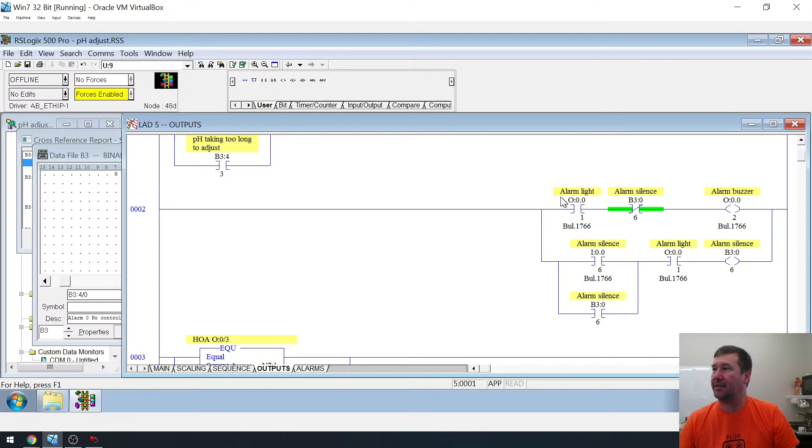Okay. So, in this case it's on the screen, so it's going to come down here. It'll be alarm silence. And bring a rung down. And first, let's just build the structure out that we have. So we got a branch, examine off, and an output energize, and then we have a branch.

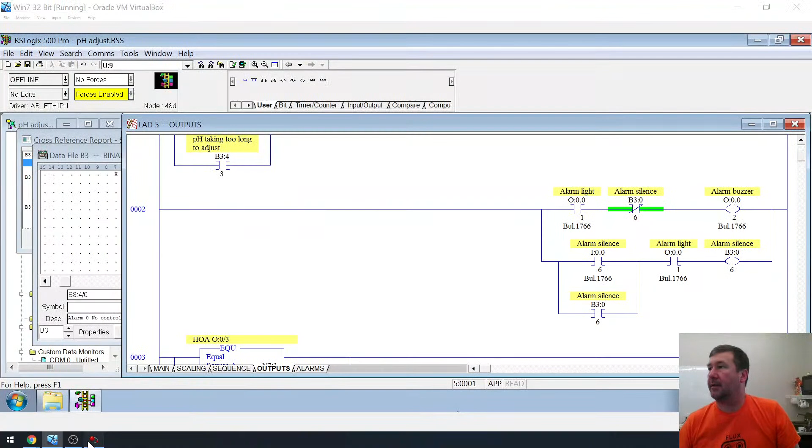And then we have, oh no, the alarm silence is a physical input, okay. Let's see, examine if closed, closed, closed, and output energize. Closed, closed. Okay, and in the end, this turns on output 2, so it's going to put that in. We have alarm silence, so this is alarm silence. And then we have alarm light. Actually, I have alarm light in both of them there.

I think I could have cleaned that up a little more, but you know, I think I said that we're going to start looking at some of the old programs, and I'm going to nitpick mine probably first. That way, nobody thinks I'm being cruel. But yeah, even looking at this, I could have done a lot of things different. But it is a functional program. But yeah, it looks like there is some room for improvement.

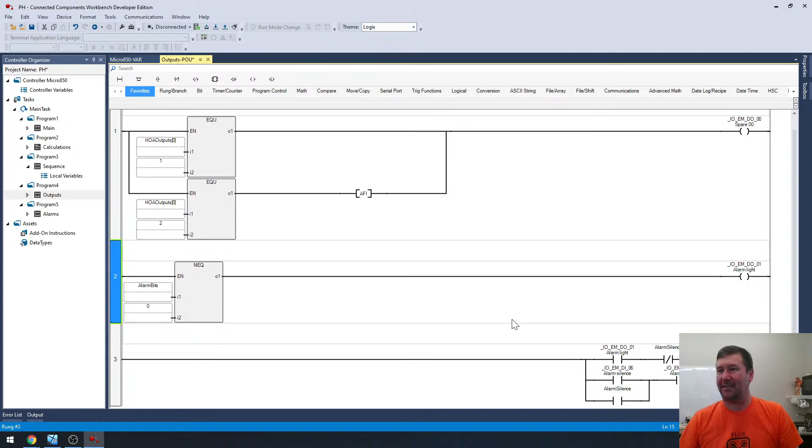Okay, so we have the alarm silence button or alarm silence. So now, alarm silence. So you notice there, I didn't have to type this long thing. That's one thing I do like about Connected Components is, one, you can use spaces. You can have a really legible description or alias. It's not exactly the same as an alias in Studio 5000. Well, that's what they label it as, but it really works smooth on that. But okay, that takes care of that rung.

Next, let's bring down another rung. And honestly, I'm going to skip this next one. It is a spare rung. Oh no, it's not going to take long. I can copy and paste it. So yeah. Just click there, copy and paste. And then we'll bring this down. Oops. Well, why is it not letting me drag? My scroll isn't working.

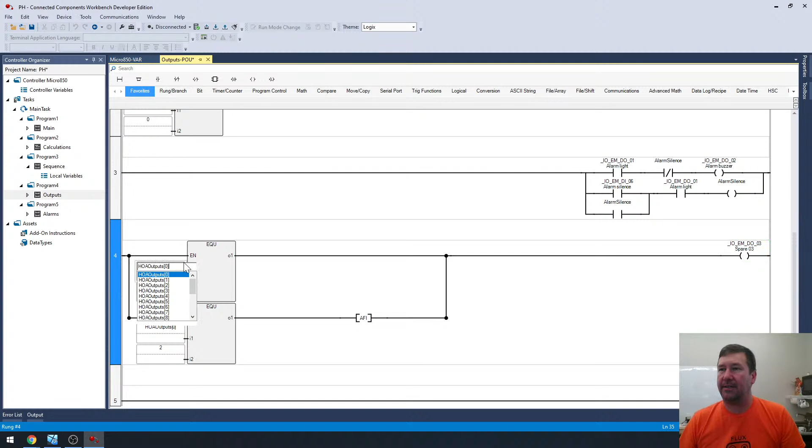Okay, so this will be number 3, which is a spare. But then this is going to be 3. And I'm just building the structure out. Honestly, I don't think there's a tremendous amount of reason to. But when I was writing this, I probably expected these to be something. And for some reason, they didn't end up being anything. But okay, now we're going to go, all right, now we have

Huh. Okay, this pump, it's like this pump occasionally circulates. Looks like every 3 minutes or 300 seconds, it runs for 30 seconds. So this is a flash on, flash off that we've done some before. But all right, let me make sure where this is used. Okay, and yeah, so it is used to run this pump occasionally. So probably the system had a little bit of issue of settling, maybe solids settling in it. So to keep it from clogging up, occasionally you turn that pump on.

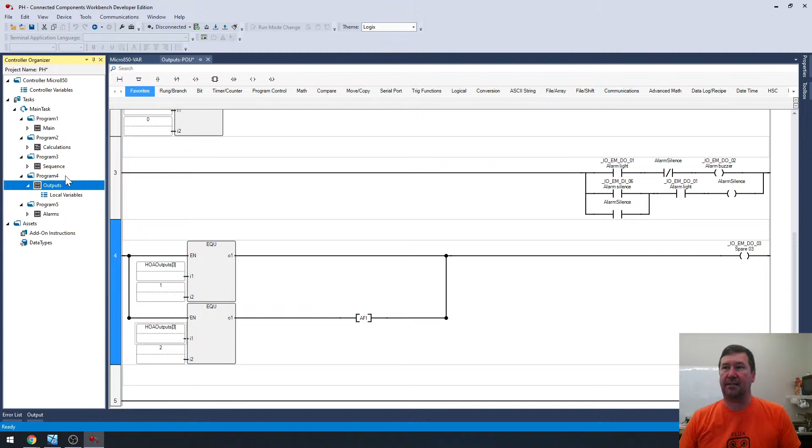Okay, so we have pump one. This will be pump one circulate on, and pump one circulate off. So we'll just make some local variables for those. Let me close some of this up. Actually, it's okay. So we're going to have pump one circulate on, and it'll be a timer. And we're going to have pump two, or no, pump one circulate off. Should have thought about this. This isn't how I would do that. I would create the TONs normally. Let's just take them back out.

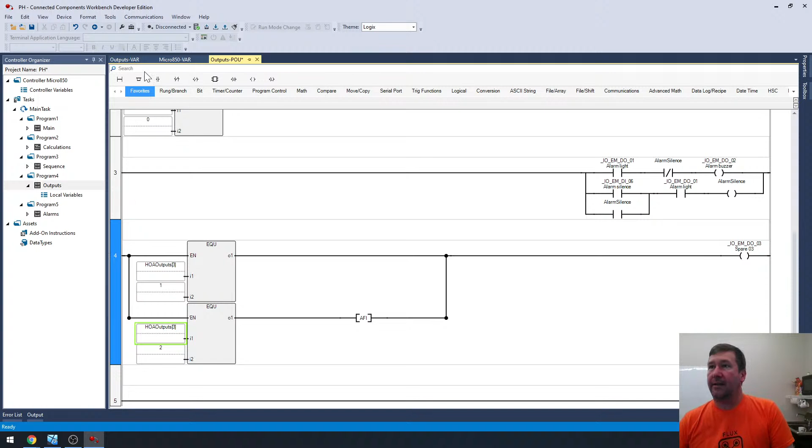And yeah, all right, bring down the rung and just start building the structure out for it. So we would have examine if open. We're going to have a TON. And then we're going to have an examine if closed. And then we're going to have a TON. All right, now I would go here to local variables, which actually, let me go back there so we can see it.

We end up with TON1, TON2. This is our circulate on, this is our circulate off. So this will be pump 1 circulate on, and this will be pump 1 circulate off.

All right, so now they come in, and so this will be pump 1 circulate off dot Q. And this is going to be pump 1 circulate on dot Q. And let's make sure. So yeah, pump 1 off turns on the TON, pump 1 on, circulate.

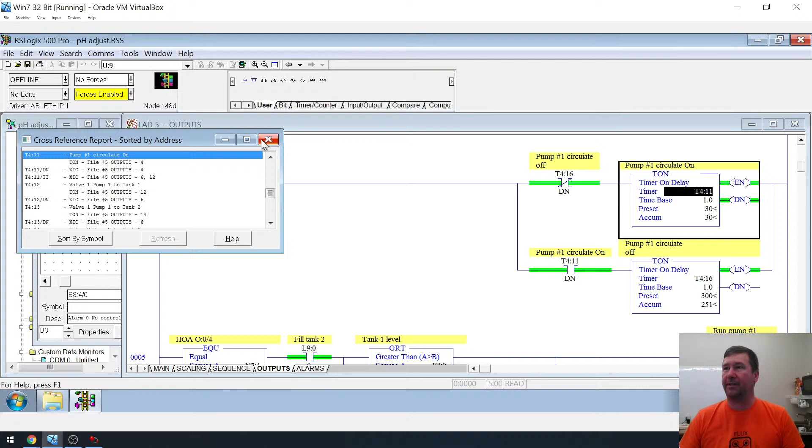But okay, looks like neither of these are settable. Let's double check. So cross-reference. Okay, we're using the TT. I don't see a PRE or a preset over here. And we'll double check this one. Again, yeah, no preset. So we're not changing this time. So we're 30 on, 300 off. So go over here. And this will be T#30S. And this will be T#300S.

Or, since we know 300S is specifying seconds, this is actually 5 minutes, so 300 divided by 60 is 5 minutes. So if I know it's 5 minutes and I don't want to do the math, I can just put in 5M. And that's going to be 5 minutes. So this will be 30 seconds on, 5 minutes off.

And again, going back to these automatically converting programs compared to at least going through it, here's a good example. This is so much clearer, 30 seconds on, 5 minutes off, compared to 30 seconds on, 300 off. I mean, yeah, we can figure it out, but there could be some crazy number in that 300 spot, and that's where this just works really well. All right, that takes care of that.

So our next rung, I believe, is actually where I was hoping to get to show you the HOA. Okay, so now we're finally to something halfway functional. Because even this one has to do with the valving. So we have an EQU, and this is our HOA. And then, oh, okay, so we have an interlock. Pump 1 can run to tank 2, or it can run to tank 1, depending on the valving of it. So we have to have a little time to make sure that the valves shift. But all right, HOA for output 4.

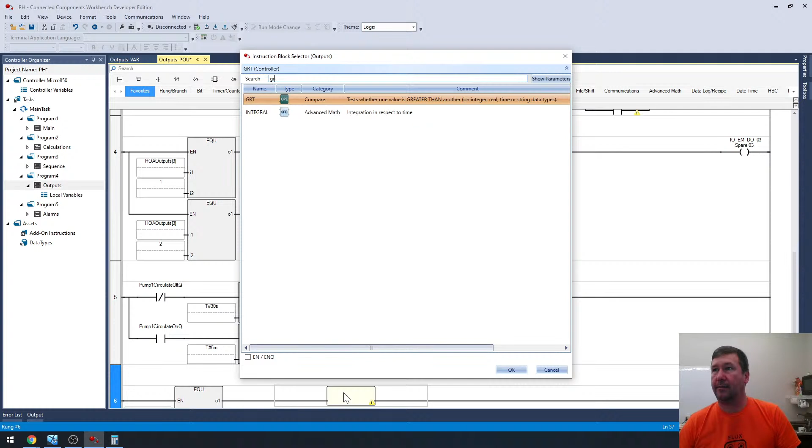And let's just start building the structure out. So equal, XIC, couple greater thans, an XIC, and an OTE. So equal, and then a greater than, and we have a branch around it. We have another one, and then we have an XIC. And then we have an OTE. Oops, wrong OTE. It's a negated one. Okay, did I actually get all that? Equal, greater, greater, XIC, I think that's close. Yes, it is. So we're going to be at HOA output number 4 and sequence fill tank.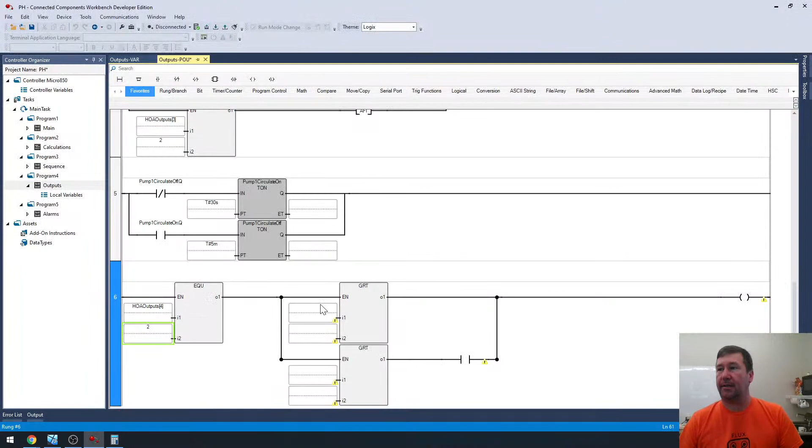So HOA outputs number 4, and then this will need to be a 2. Was that 2? Yep, 2. Oh, whoops! I left an XIC out there. And so this will be sequence fill. Oops, my guessing isn't working. I don't remember what it is, so we're going to have to go up here and look. Yeah, sequence fill tank 2. I don't know why I couldn't find it, but there we go.

Ooh, so I made a mistake. I made all of the sequence outputs, even though I made the sequence a global variable, I did not make these global variables. So these 3 need to be global variables. I wonder if I can just cut them out. Can I cut them? Says I can. Let's see if I can just paste them up in the controller variables. Yes. All right, so now we got outputs.

So just so we understand what happened there, if you have a local variable, you can only access it from the local program. If we have a controller variable, we can access it from any of them, and it's easier at least to access them from the outside. So that's what we did there.

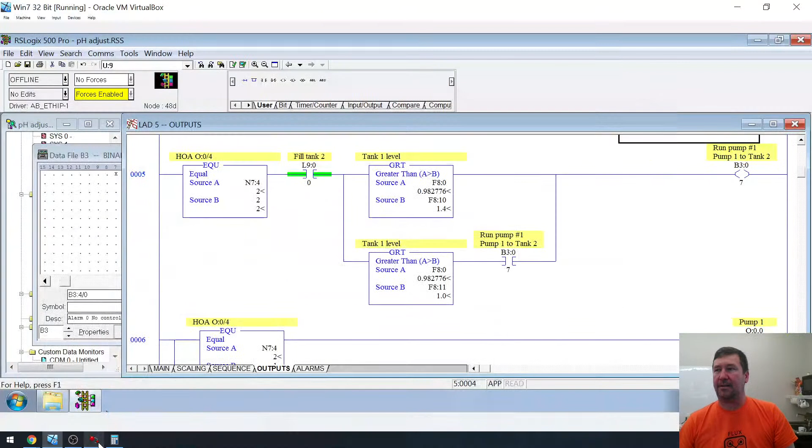All right, now we're looking for tank 1 level is greater than, what are these? Cross reference. Tank 1 start pumping setting. Tank 1 stop pumping setting. So let's create those 2. These will be controller variables as well. Tank 1 start pumping setting, and it'll be a real. Tank 1 stop pumping setting, and it'll be a real. All right, so we're looking at tank 1, so we just type tank 1 level. And then right below that was tank 1 start pumping. And then tank 1 stop pumping.

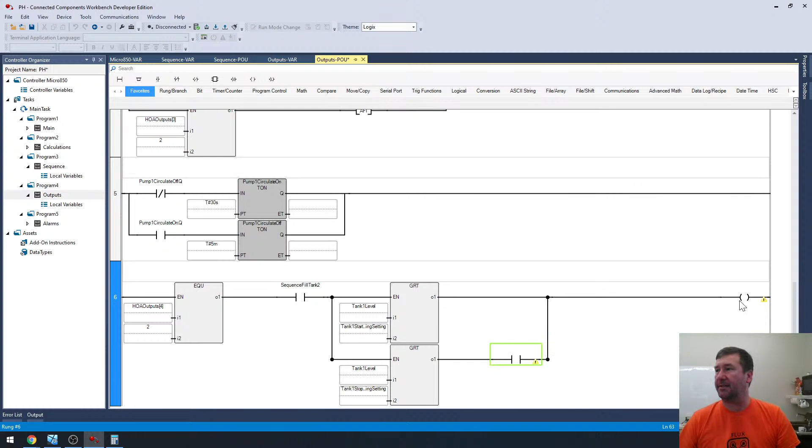And then we have run pump 1 to tank 2. Okay. I don't think I can simplify that either. That is what it is. So that will be run pump 1, tank 1 to, oops, tank 1 to what? Make sure I am.

Tank 1, pump 1, run pump 1 to tank 2. How about run pump 1 to tank 2? Let's simplify a little bit. I think it's still clear. Run pump 1 to tank 2. And that'll be a boolean. And we'll take that same tag and we'll put it right there.

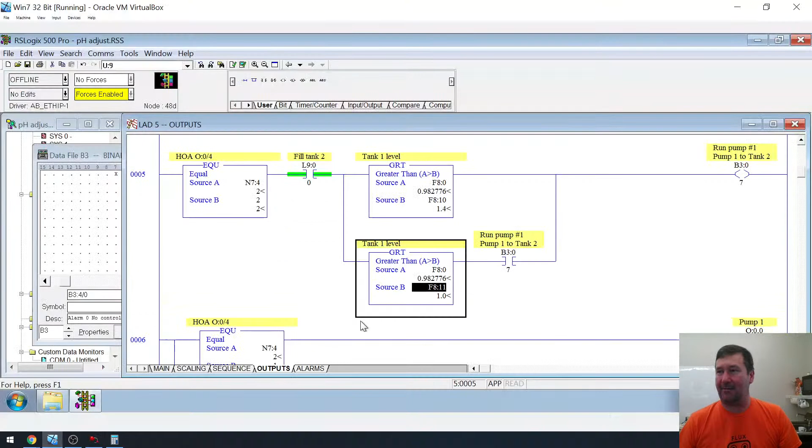All right, then I think we're finally to the HOA that I was like, yeah, we'll explain that in just a second. All right, so here is more of what you would typically see on the HOA. And I probably should do a video just about this. So in this case, we're on number 4, which is pump 1's HOA. And first, if it's 0, there are no true conditions that will go through. So our HOA in position off, or HOA, I'm assuming you know what that means. That's a hand off auto. In the off position, it's a value of 0. So we can never run pump 1.

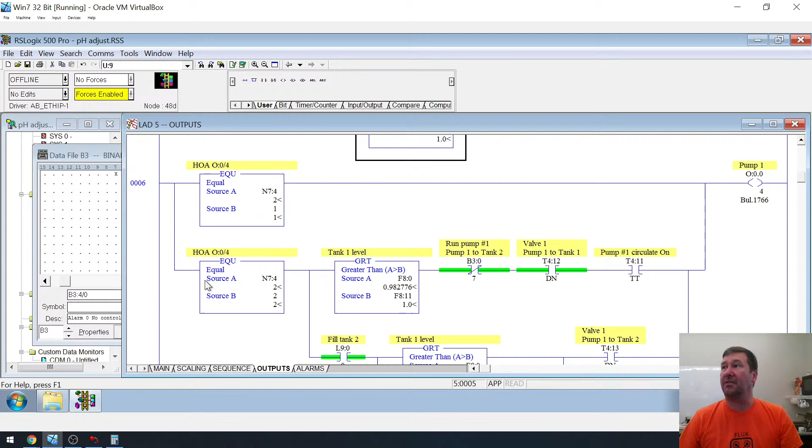And 1 is hand, and so you'll see it with almost nothing else in it, usually nothing. Because I kind of believe hand is hand. You put it there, you take the risk of burning whatever up. And then you have auto, and it's going to have whatever conditions you happen to need to run in auto mode. But all right, so now we should be able to copy and paste that first rung and give us a little bit of structure to work with.

So I'm going to copy this. And then we're going to paste it here. Oops, pasted 1 too high. All right, so this is output number 4. So this will be HOA 4. This is HOA 4. And this will be number 4.

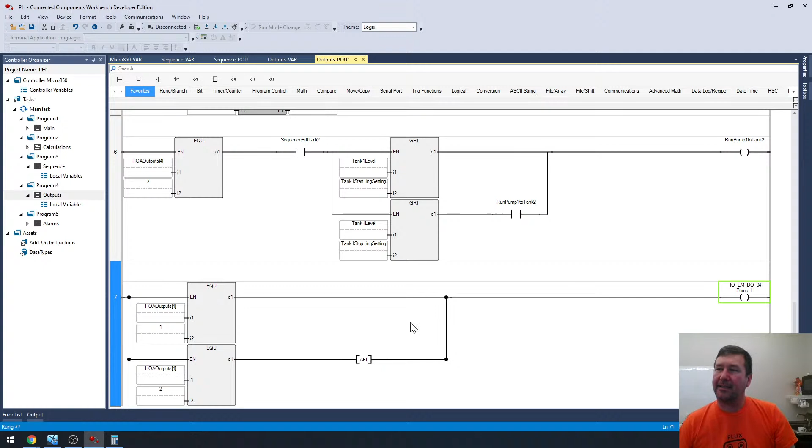Okay. Now, honestly, I don't know if there's a lot to gain in actually showing this, because at this point we're getting pretty redundant. There are more conditions here, and maybe we could do a video on how exactly this works if somebody's really interested, but this is a conversion. So I think we've kind of shown the conversion through there. The last thing we really have is the alarms. Let me just browse through here, see if anything really jumps out. Now I think we've covered all this. Yeah, so now let's just go to the alarms, because I can do the rest of this offline. But mainly let's just see what else there may be to cover. But okay, here, let's go through these alarms because these are all really good ones to have.

First, this has separate PLC power compared to its control power. That way your PLC is up if, say, you short out an input. So one thing you want to know is that input on or off? And that's what we're doing here. If there's no control power, then we're going to make an alarm for it. And we do have a delay on most of these because if you have an erratic problem, you really don't need 100 alarms a minute. But also, it just helps with operators; they want to know when something's wrong, but you don't need to nuisance indicate to them.

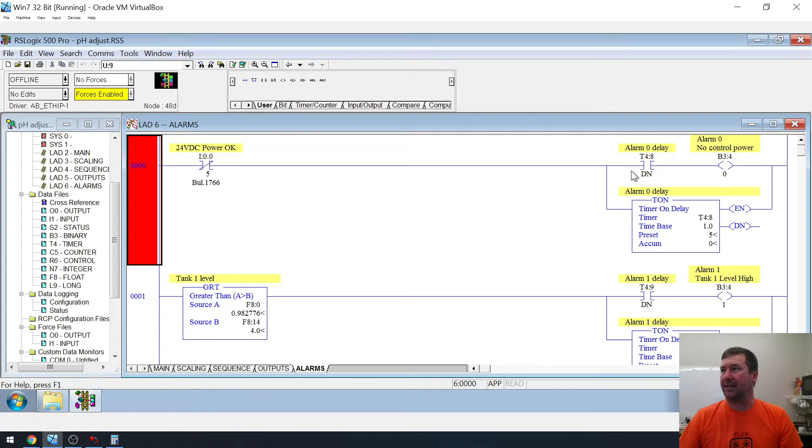So let's go ahead and put this in. So we're going to be in our alarms program now. Okay, and already we had the downstream analog we stuck over here, and that probably does fit here. We'll put this above it though. And let's examine if open. And again, I don't remember what input that was, but I think I labeled it as no control power, so I can just start typing no and maybe get lucky. No, I'm not going to get lucky. Nope, didn't get lucky. Okay, well then we will look here, it's input 5, 24 volt power, okay. So there's that. And then we're going to need a branch. We need an output.

This will be a TON. And so here's an example. I don't particularly care about this TON anywhere else, so I don't know that I really need to name this one. In this case, I would leave it just as TON1 because it is localized just to this area.

So we're going to put T#5S, and we're going to put TON1.Q. And in that case, we made some alarms. Let me see if I can find it. We made alarm bits, and that's going to be .0. So this way, if our control power drops out for more than 5 seconds, we're going to sound an alarm, and it'll be alarm bit 0. Still would love to have a description on bit 0, and I don't know how to do that.

All right, we're going to copy and paste that rung. And we do have to be careful when we copy and paste there, because notice the pasted rung went above it and it has the 2 in it. So this no longer works. We want to drag this down. And this one is going to be 2. Now I'm not really that OCD that I want this to be 1, 2, 3. If you are, you need to label them as something other than that, because as we copy and paste stuff, we could end up with one somewhere else that's not going to lay out that pretty.

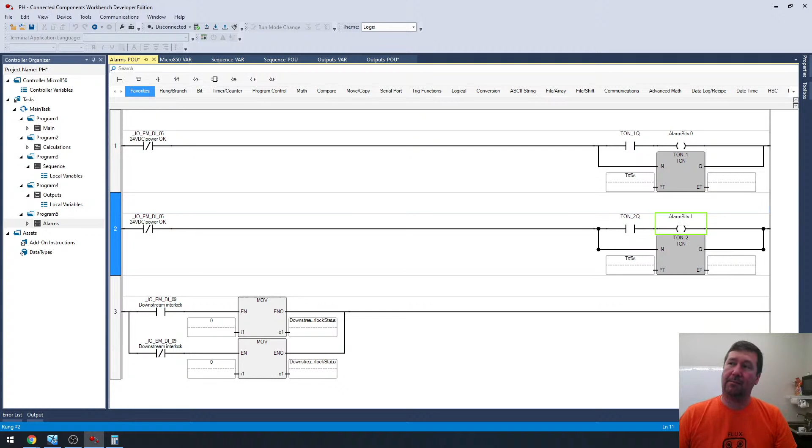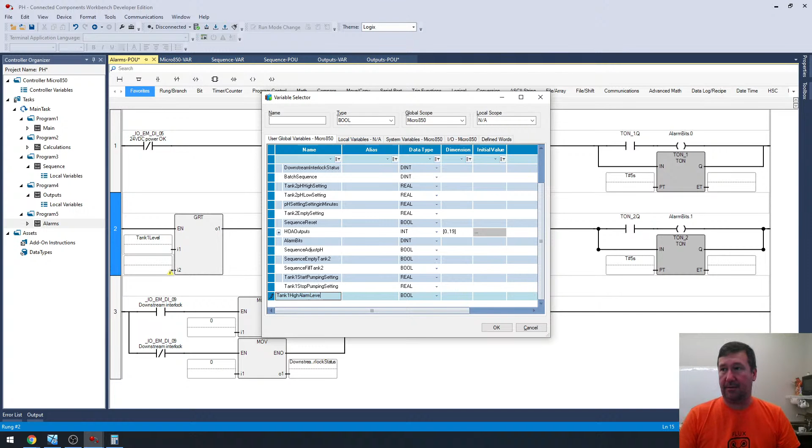But all right, what do we have here? So this is tank 1 high level, and we're looking for tank 1 to be greater than, probably tank 1 high level settings, my wild guess. Tank 1 high alarm level. So in this case, we're going to bring down a greater. This will be tank 1 level, and this needs to be a global variable because we're going to set it on the screen. Tank 1 high alarm setting. No, actually, I would do tank 1 high alarm level. That way we know it's a level. Real.

Okay, and that was 10 seconds on that one. All right, then we have that. And is there anything else to really learn? I think we can figure that rung out. This is more of the same. Looks like this one, the alarm is settable, but that's doable.

All right, now here's another one of those I have not figured out how to do in Connected Components. It may not be that necessary in Connected Components, but it is here. In this case, I copy the output word, which is the 16 bits of inputs 0 through 15, to an integer with binary format. And you can't do this in Connected Components that I know of. In other words, I cannot specify our inputs to the word level.

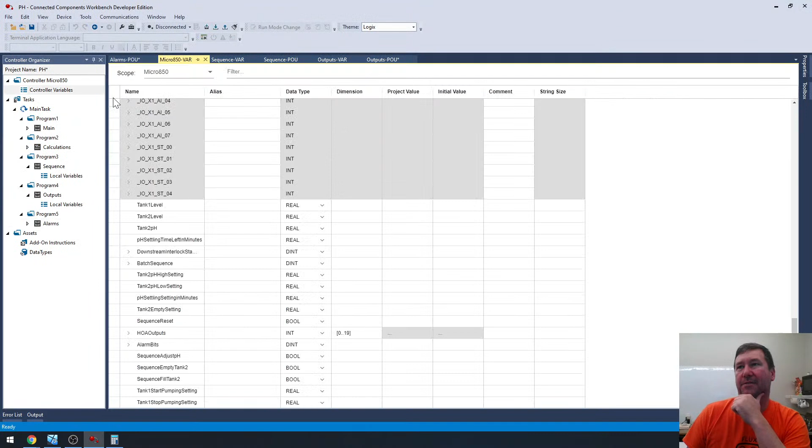Because if I go over here to my controller tags, they just start being listed. So either you can't do it, or maybe somebody can show me. Maybe there is some hidden way to address. What happens if I address IOEMDO? No, it's going to come up as a bad address. So I don't know how to actually do this. But it seems like with some HMI I was using, you couldn't directly read inputs and outputs. That's how I started this. But in Connected Components Workbench, you can directly read inputs and outputs with an HMI. So this actually is fairly unnecessary.

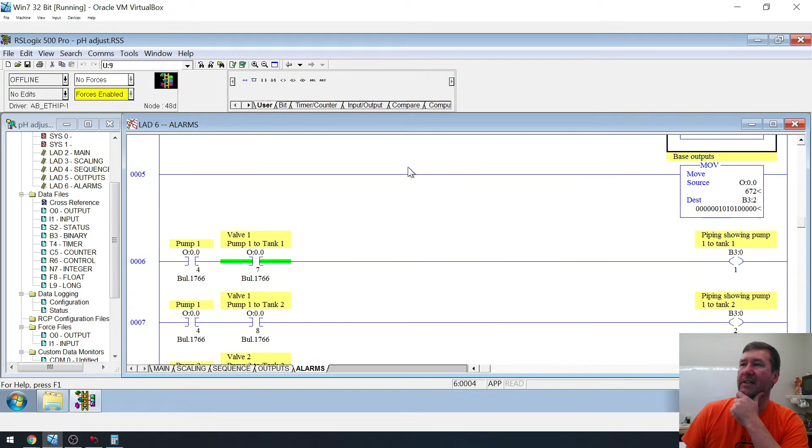And actually on the HMI, we show where the water's going when the pumps are on and things are happening. So that's all this is doing, making different ones come on under different conditions. I don't think there's a lot to go there. That would make good for the HMI series, though. Maybe I should build this out in the HMI series, and then we can show how you can graphically show that our pump is kicked on. Change your pipe color so everybody knows water's flowing through it, or put some arrows going along. It would be a good thing.

But okay, so I have gotten through my first live stream, and I had down that should take about 2 hours, and we're at 12:56. Well, we were 7 minutes late because my technical guru Michael was not here to fix my sound issue or my streaming issue, but we did get online, and I hope this has been helpful.